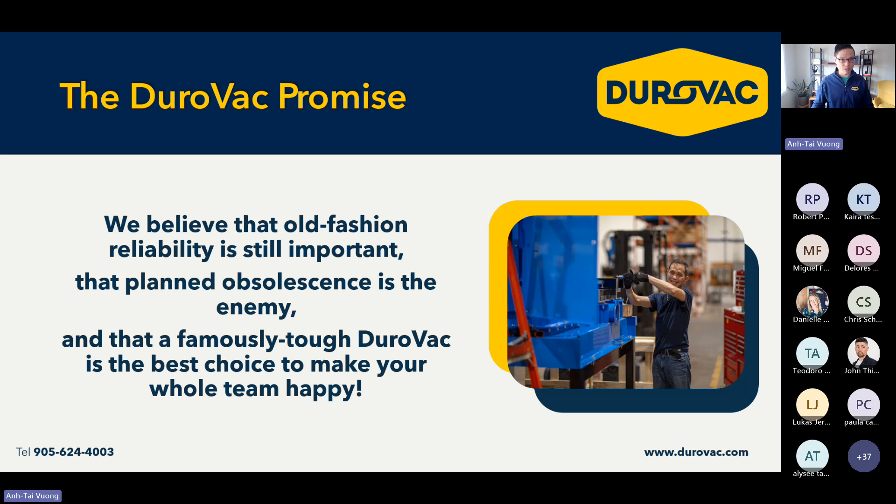There are 5 key visions here at DuroVac. We're trying to build a timeless and inspiring company we are all proud to work for. We're trying to be number one or number two in our top 5 industries, which I'll cover a little later on during this presentation. We're trying to achieve a 30% win rate for opportunities by 2030.

By the way, last year we were at 21%, so we're right on track. Vision number 4 is to fulfill orders on time, smoothly, and profitably. Our 5th vision is to deliver timely and accurate financial data, such as to make financially courageous decisions.

Once again, there's a lot in there to unpack. If any of you are interested in some of the more nitty-gritty details about these visions, feel free to reach out to my team or myself. Happy to engage a conversation about these.

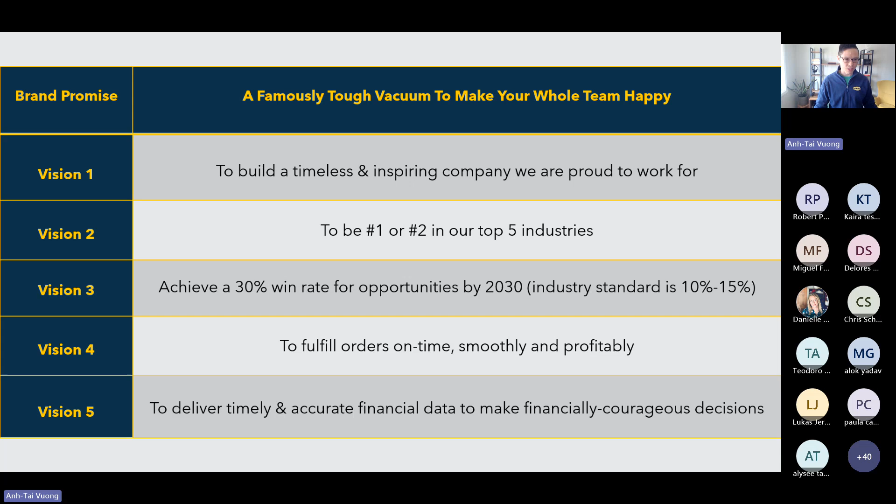All right, so what do we do? What do we provide here at DuroVac? We tried to summarize this with my team into 5 key buckets. We do private label OEM, original equipment manufacturing. We build portable, semi-portable, and fixed or central vacuum systems. And we provide the hose, tools, accessories, and spare parts for them.

Simply put, let me go through that again. We design and build industrial vacuums that are portable or semi-portable, that you can fix to the ground or not. Fixed vacuum systems that you can pipe throughout your facilities. We do this and private label it for certain companies that do their own sales and marketing. And we provide all the accessories and spare parts for them. Simply put, that's what we do.

Moving on, over the years we've grown to develop an expertise, and this is what we're becoming known for in the market. We're now going deeper into fully customized solutions, as well as engineering and design services. If you have any questions about these offerings, feel free to reach out to my team. We'll be glad to engage in a conversation with you.

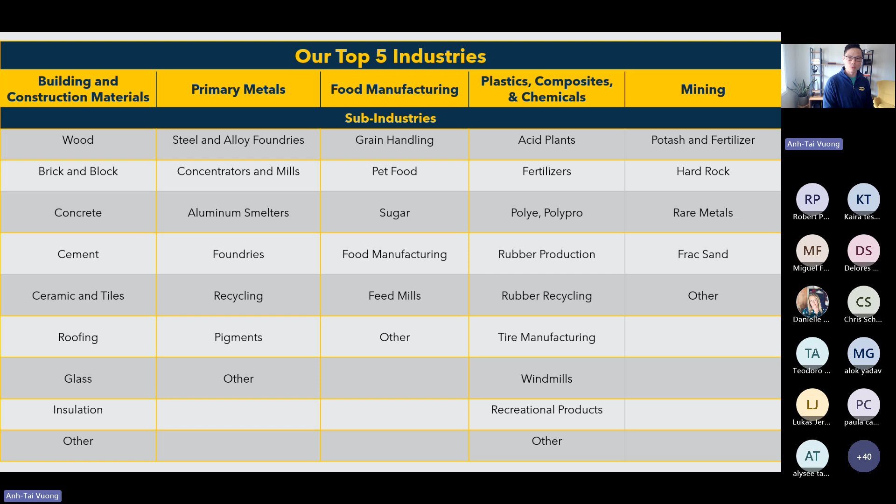This slide shows a brief summary of who we service, the types of companies we provide for, many of whom you're probably familiar with.

We're very close to moving into the tangible machines we provide. But before that, it's important for me to make a distinction, because I've heard this misuse of the terms 'high vacuum' and 'dust collection' regularly from our customers. To be clear, the industrial vacuum systems we design and manufacture do collect dust, so technically they are dust collectors.

But in the industry, dust collection systems pertain more to systems with lower pressures and much higher volumes of air. They're designed to capture airborne particulates or process-related dusts. They're usually ducted using lighter gauge ducting, and they provide source capture or dust control for manufacturing processes. Essentially, they're much bigger systems physically.

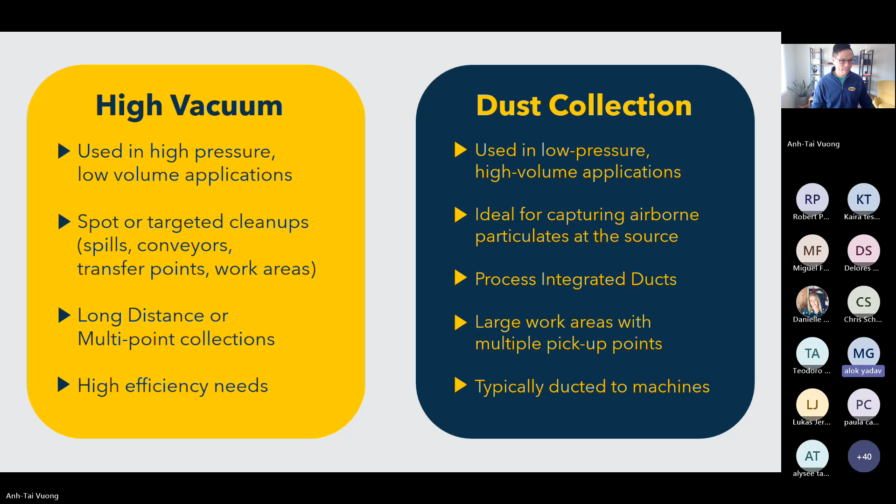Between 2008 and 2013, my partner worked on designing a software that would take 7 or 8 questions and allow us to provide you a solution. These are what we call the OSE questions, or the Online Selection Engine questions.

When we need to find a solution for you, what are the materials? Be it wood, cement, or feathers. What's the size of the cleanup problem? Are you up to your shoes or up to your waist in material? Big difference. Do you want this machine to be portable, semi-portable, or central? How much hose do you need connected to it? Will it be used indoors or outdoors?

What will you do with the material? There's a difference between doing general housekeeping and vacuuming up 50 pounds of material. Yesterday I was in a conversation about collecting 20 tons per hour of a given material. We've got to know what we want to do with it.

How many simultaneous users, or concurrent users — the number of people that will be using the system at one given moment. Also, how far do you want to move the material from the farthest point back to the vacuum system? Based on our 23 years of existence, by answering these 8 fundamental questions, we can come up with a solution within seconds using our software.

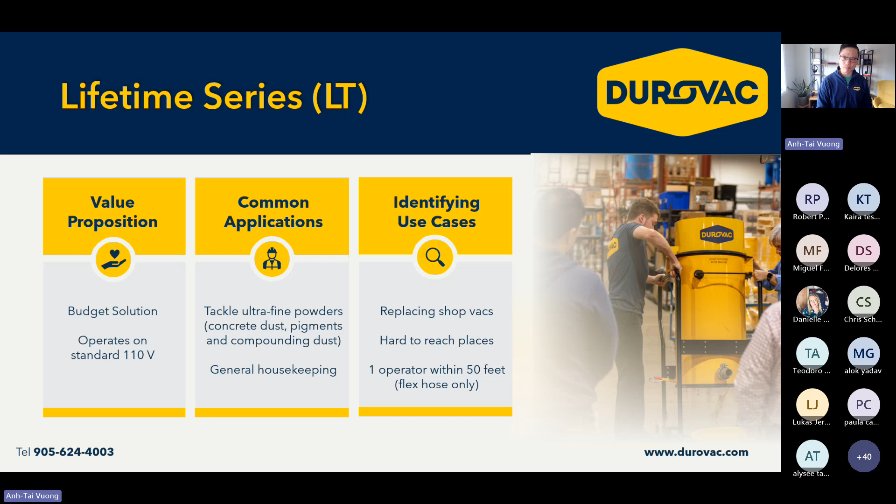Moving on, we have our DVR and DVP series. These use a combination of regen or side channel blowers, or positive displacement, PD, or lobe type blowers.

We've designed this compact series of portable vacuums as an economical, econo version of the next product that I'll present, which is our flagship product. These will be able to answer a lot of applications where budgets are more sensitive, and they do material conveyance to central vacuum systems using these little vacuum systems — and I say little respectfully.

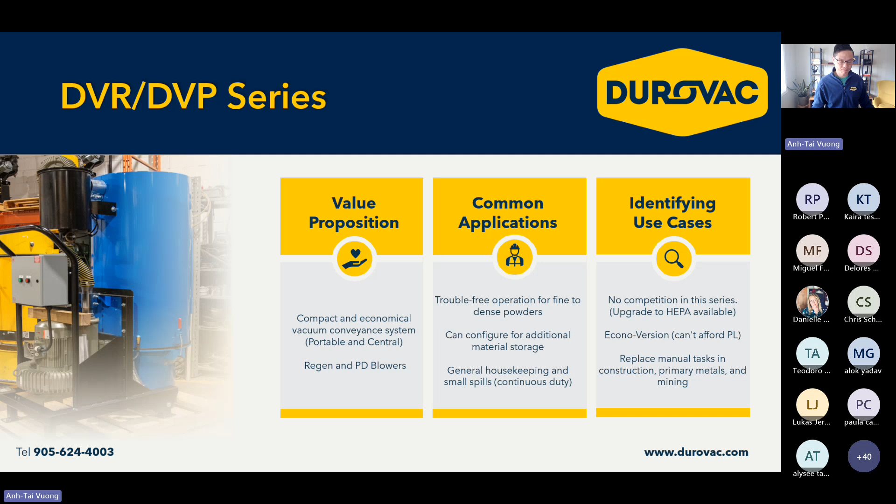The Powerlift. The Powerlift is our flagship product. This is the product around which our technology and design investments are made at DuroVac. We started off this product, and the existence of our company hinges on it, where it has the most level of variances and configurations, all pre-built into our software.

Many of the applications we cover in our top 5 industries will have the Powerlift as a starting point. If you go on our website and visit the product, it's essentially a vacuum system for plants and industries that is about the size of a small car. It weighs somewhere between 4,000 and 6,000 pounds.

It's moved around using a forklift, but it's very compact, and it can plug into your plant grid, such that it's very versatile within your operations. Lots of use cases, lots of applications that we can cover with this.

Essentially, when we drilled down to it, we probably have somewhere in the neighborhood of about 35 to 40,000 possible permutations of how we can move parts around on this system to deliver a solution — all within minutes to a day, where we can provide you a detailed quote to solve your plant issues.

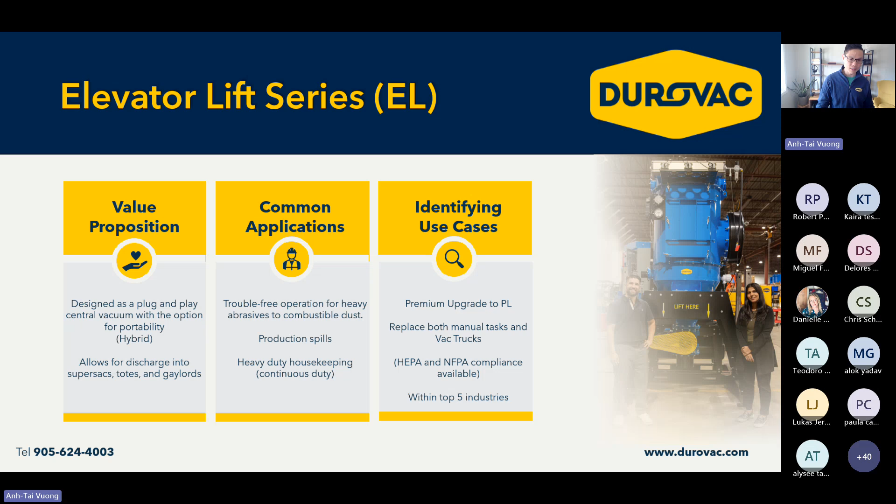Lastly, in our product offerings, we have our Core Central series. This applies all of the knowledge, components, and configurations you've seen throughout our product line - the LT, the DVR, the PL, and the EL. It's essentially a combination, call it an IKEA set of parts or a Lego set of parts, that we can put together to answer very specific central vacuum needs. The Core Central series absolutely needs to be bolted down to the ground and piped in order to be functional within your plant operations.

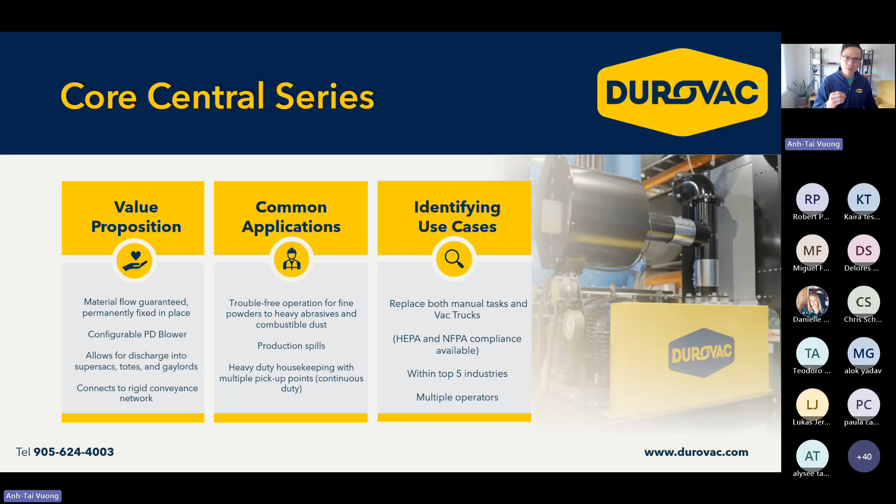There's a lot of folks on the call, so I'm not going to take a break for questions until the end - we're almost done. I'm going to move into a couple more slides that talk about more marketing analytics.

There was a slide that was kind of interesting for those who eat up data analytics like myself. Earlier there was a slide about our top 5 industries and how we made that decision at the company - well, here it is. In the first quarter, Danielle and I crunched the numbers and demonstrated using this chart our 3-year average win rate in terms of delivering solutions. Our highest win rate market is food manufacturing, at 24%.

I've been at this sales game for a long time, and if I make 10 quotes and win a quarter of them, that's really awesome in my books. Not only that, but the determination and decision to keep these as our core top 5 industries is based on all these sales and marketing analytics. So if you work with us on a lead or opportunity that falls within these industries, we will win 1 out of 5 times, if not more, because this is ticking up year by year right now.

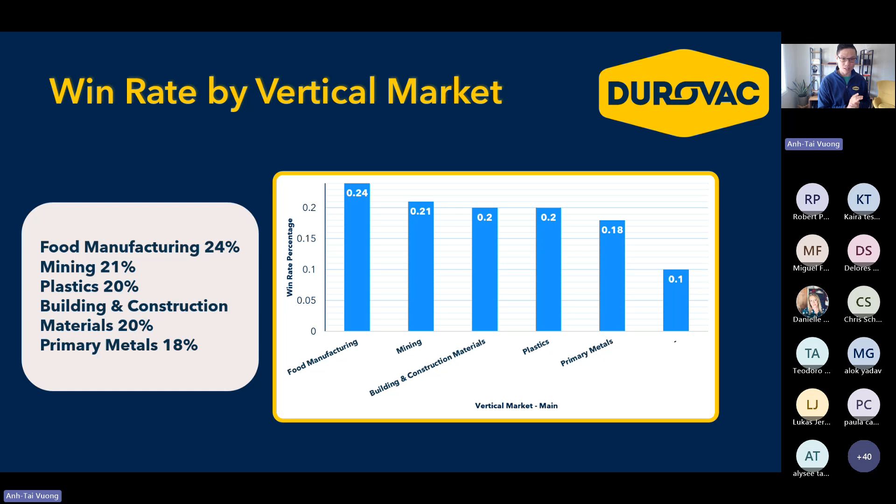Giving you a little bit of an interesting portrait here. I'm going into a segment of the presentation where I consider these a little more like cheat sheets. So if you're curious about our products or have an application you're thinking about or budgeting for your facilities, you can consult these latter slides, slide 21 and onwards, as cheat sheets.

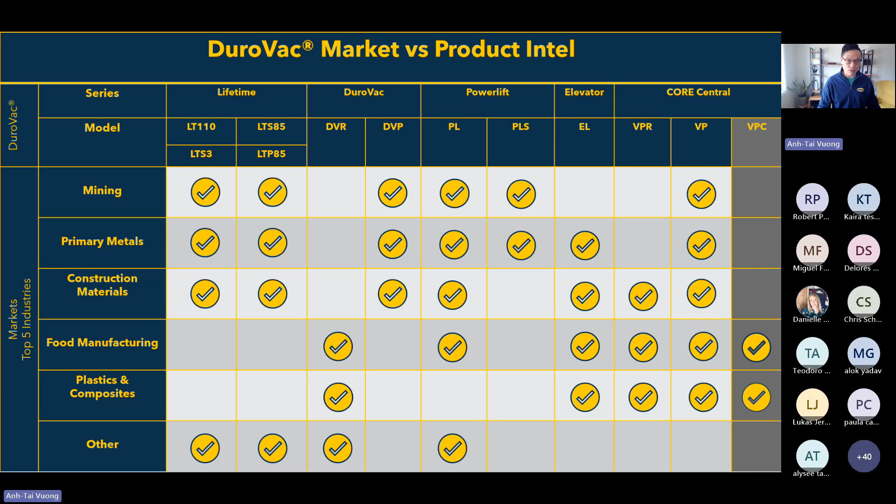Moving on, we have another series of these consultation or cheat sheet slides, again based on our CRM data analytics - depending on the industry you fall under or work with, what type of products are most likely to be quoted and supplied.

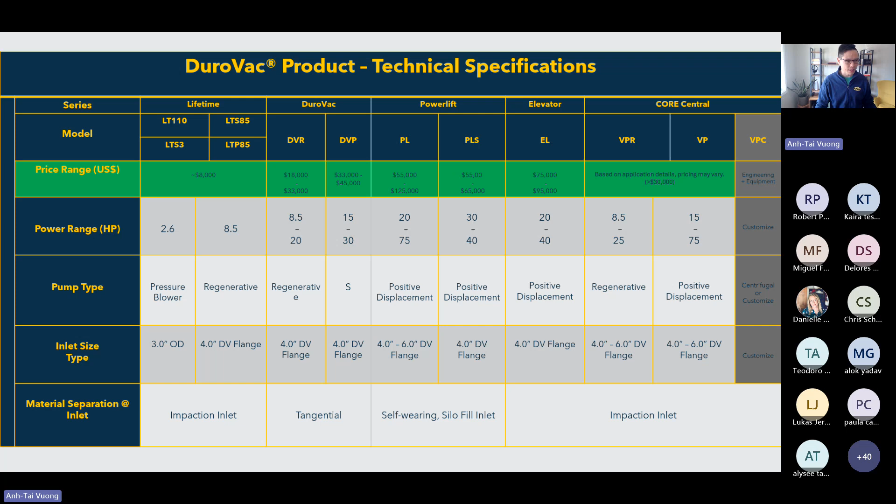Moving on, the same thing - some technical specifications, just a summary of a lot of our data sheets and information that's readily available on the web. This covers the range from the LT all the way to the central vacs, and again just a summary of technical specifications on how our systems are put together.

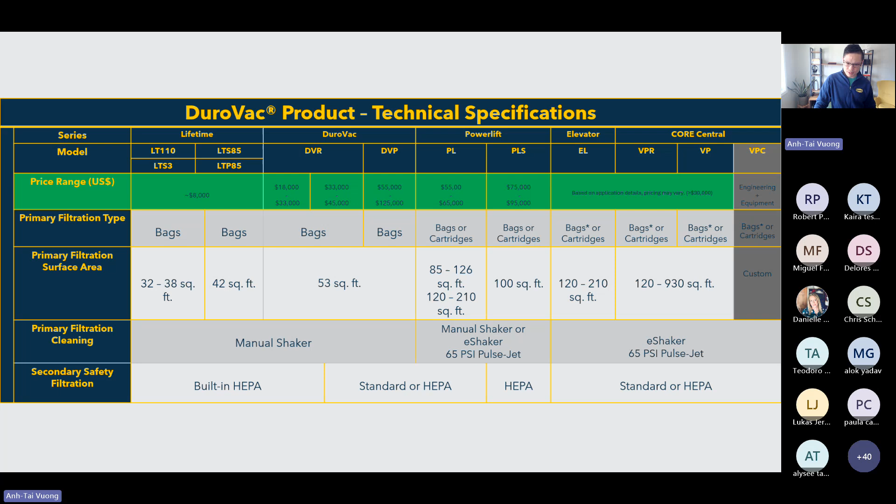So slides 21 all the way to 26 will give you a guide on how to select a vacuum system here at DuroVac.

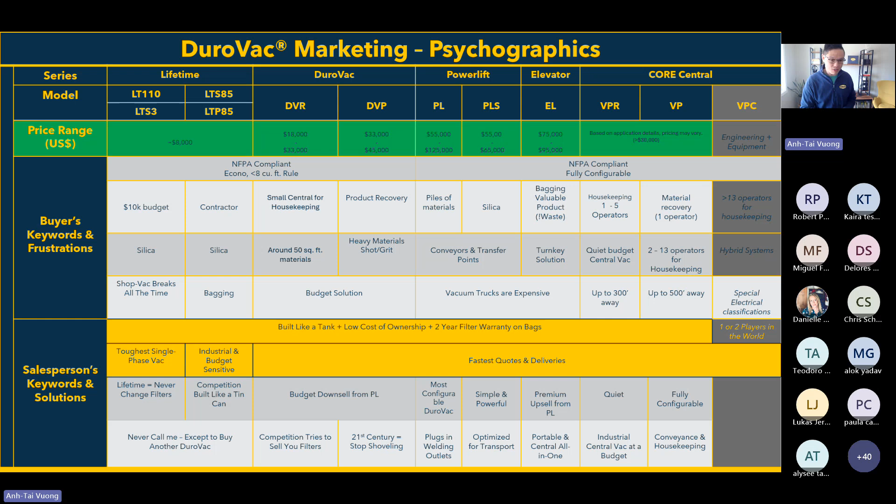I myself have done sales, and I've got a sales team in our company now. They'll raise their hand and say, hey Anh-Tai, can we do water and can we do liquids? The answer is yes. But do we do it here at DuroVac? The answer is most likely no.

Lastly, a nice summary slide that we've prepared here, identifying some of the key applications, whether you're more from the industry, working with a consulting firm, or one of the distributors or dealers. The common facility pain points we're seeing now based on analytics are: plants are short-staffed, people are overworked, a lot of cleanup jobs in 2025 are still manually done with shovel and broom, and there's a health and safety concern because sometimes workers put themselves in harm's way.

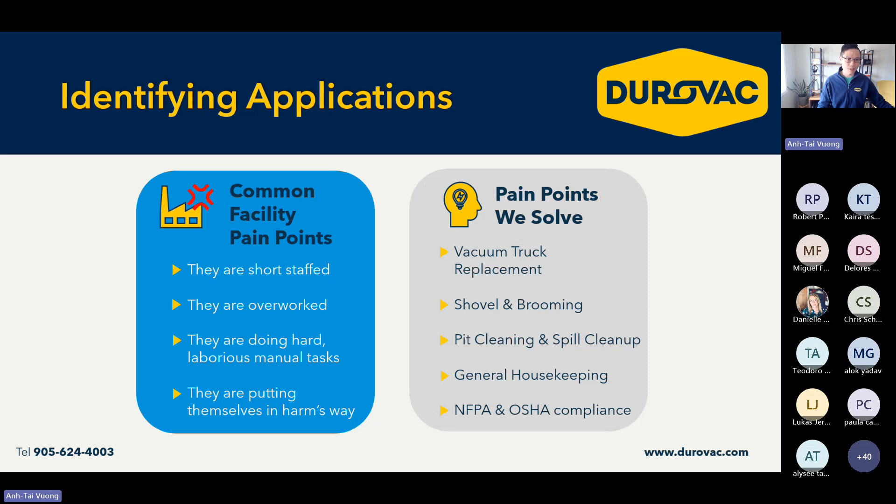Okay, so just a little bit of a summary here. We're 30 minutes in, and I'm really glad we got through this 30,000-foot view of what we do and how we do it. We're going to go into our Q&A period to see if anybody has any questions. Danielle's going to be managing the mics and taking us through it. Thanks for your attention to the presentation. Any questions, feel free to raise your hand.

Oh, there must be questions from the audience. I saw Chris on the call. Chris, I'm surprised you don't have a question for me, Chris.

Well, hey, look, I guess it was crystal clear, the presentation. So maybe a question I'd ask Anh-Tai, or to the audience, is there anybody who has any particular applications they're looking for industrial vacuum solutions for at this time? Or anybody who has questions about, hey, you know, I think it's vacuum but it might be dust collection? Now's the time. We've got our industry expert here, Anh-Tai, that we can pick his brain while everyone's on the call. There's no bad questions. I may even add there's many industry experts, now that I look at the attendees. So yes, if you work for a plant, work in the industry, have a client, you're a consulting firm, and you have a head-scratching kind of application, do ask. It'd be great to share this information with everybody else.